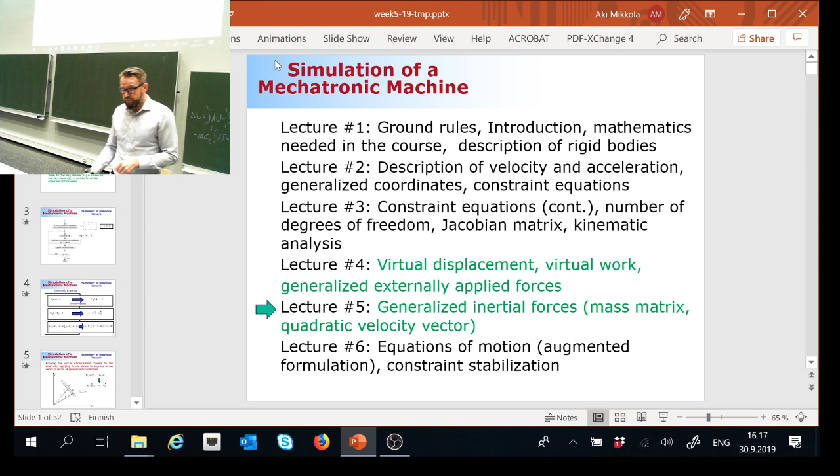Now, there's another reason to have a lecture in the 7th week, and that is related to our students that are following the lecture using this online option. These students are entitled as JEDI students and MEC/ELEC students.

They will be around in week 42, which is within 2 weeks. So they will be here in the university, and they will do the intensive tutorials during that time. I'm hoping that this goes to online participants—once you're here, you'll take this opportunity and come see this lecture live, here in the lecture room, which is 2310.

It's one of the big lecture rooms we have. Hopefully you're here just to see how it appears, how the recordings actually are, and I think it's going to be fun for you too. Now, this affects you too, guys—I mean it affects all of us.

Because in week 42, which is a Monday, October 14th, there is no guided tutorials for other students. So tutorials are for JEDI and MEC/ELEC students only.

So nothing for you in that particular week, except lectures, of course. Also, the next week after that is midterm exam week, so there will be no lectures, no guided tutorials. Only action we have is a midterm exam, nothing else.

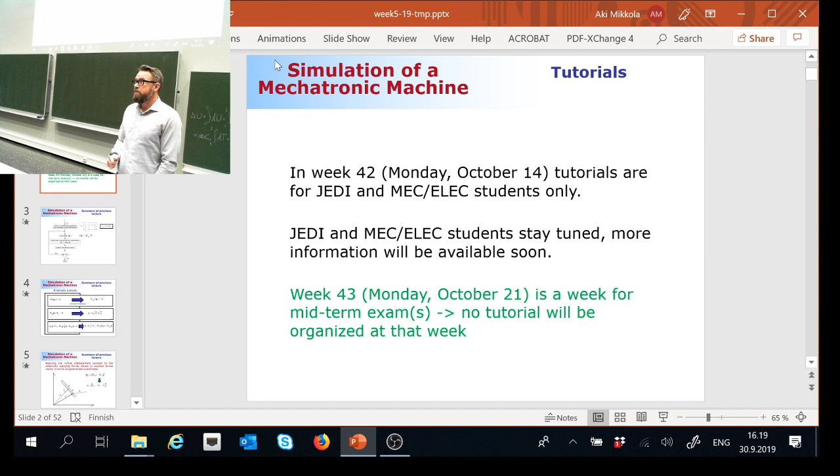Last week we looked at kinematic analysis. Now, let me emphasize this: kinematic analysis is for a system where the number of degrees of freedom is equal to 0. This is the only opportunity to run the kinematic analysis.

How come? Well, simply because the kinematic analysis will be carried out by using the information that is in the constraints equation. Nothing else—that's the only information we need. Now, in order to do that, you have to create something called the Jacobian matrix, which is something you can get when you differentiate your constraints with your variables.

Your constraints are denoted as a vector C, like you can see here. So it's a vector C here.

Let's use this. Now it's here.

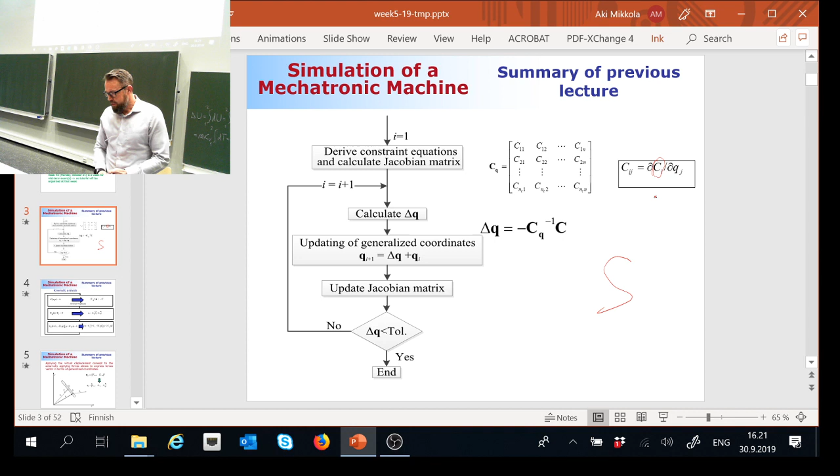So what I was about to explain is that you have to have your vector of constraints, and once you differentiate that with respect to your variables, your generalized coordinates, that's how you build your Jacobian matrix. This equation shows how to compute the individual components within your Jacobian matrix, and your Jacobian matrix eventually looks like the one shown here.

Dimensions of the Jacobian matrix correspond to your number of constraint equations and number of generalized coordinates. You can invert the Jacobian matrix, which is exactly what you need to do when computing the Newton-Raphson. This inverse is possible only when you have a square matrix, and that tells you that the only possibility to run the kinematic analysis is that you have 0 degrees of freedom.

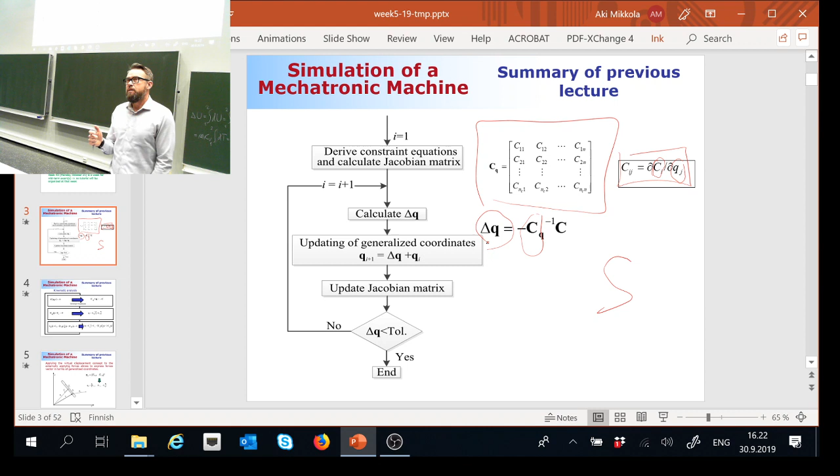This is how you carry out the kinematic analysis at the position level, but there are two other levels you have to handle: velocity level and acceleration level. They look more involved, but in reality those steps are much simpler than the position level, because in velocity and acceleration level the only thing you need to do is a substitution.

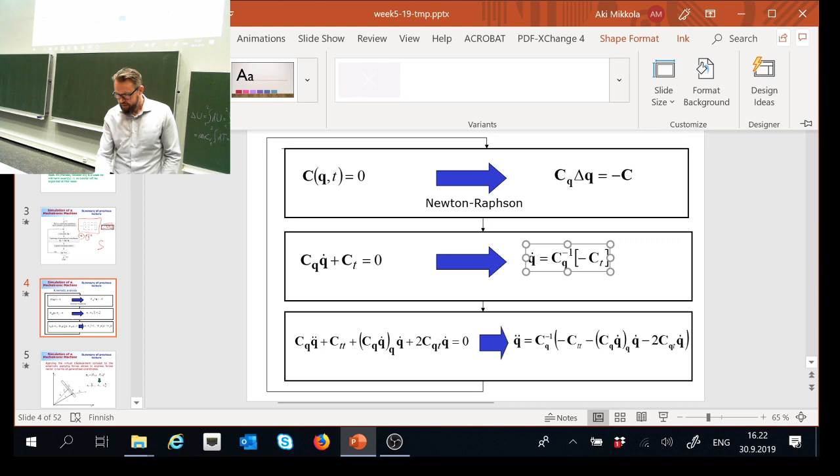Again, there's not... how come it keeps disappearing, my writing? Where can I put my pen? Here? No, here. How did I do it in the previous case? I forgot already. Where was it? Was it here? No, it wasn't here. So was it design, or ink? Where can I see ink? Oh, here, yeah, that's how I did it. So now, I was about... where was I?

Velocity level. Look, I'm getting better at remembering what comes to mind. My memory is very strong but a little short. Anyway, this is the Jacobian matrix that you need to invert, but getting velocity is all about substitution. You substitute your information into these particular locations, that's it. No iterative process, unlike in the position level.

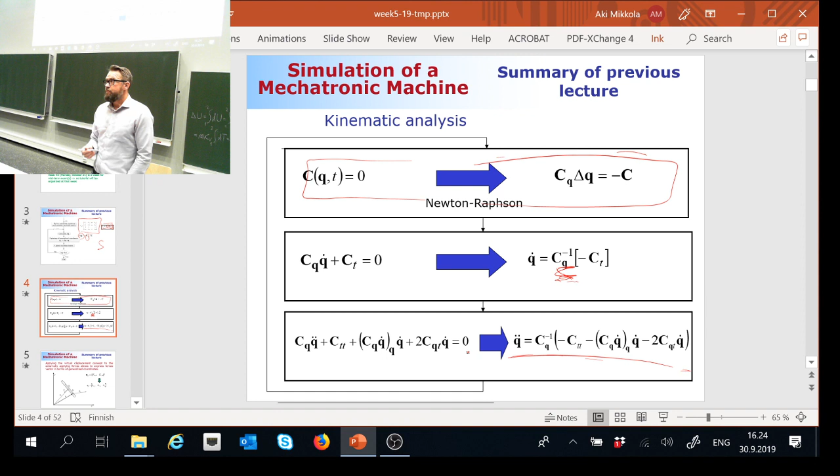The position level is the first step you have to carry out, and that is based on an iterative process. The next one is just substitution, and the acceleration level is also based on substitution only, nothing else.

Last week we opened this painful topic related to generalized forces. Now you need to pay attention, take your notes, and listen, because this is now very, very important to understand. The bad news is that when you were struggling with the concept of generalized external applied forces, you still have to understand it, because next we will apply this very same concept to inertial forces, and it will be a mathematical nightmare, very involving. So you have to understand the concept already this time. Make sure you're paying full attention.

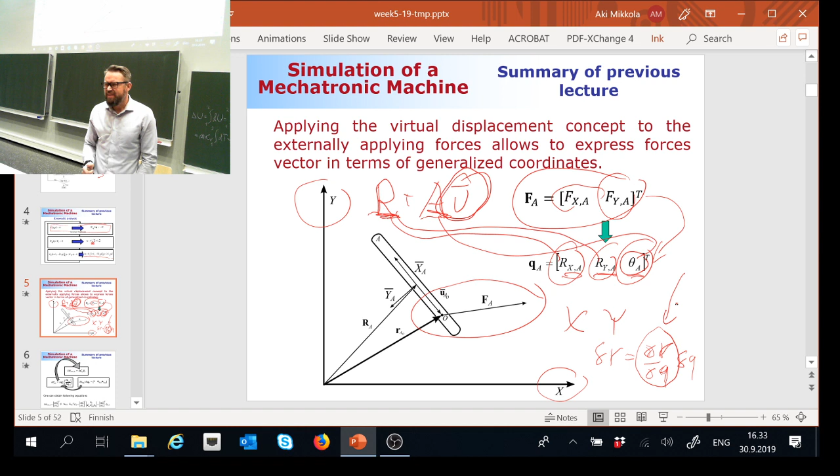I can see some people are doing this, others are like, oh my God, this is painful. My advice is to do this, because otherwise I keep repeating this, and how it comes to your head is like a broken radio. I'm very, very confused.

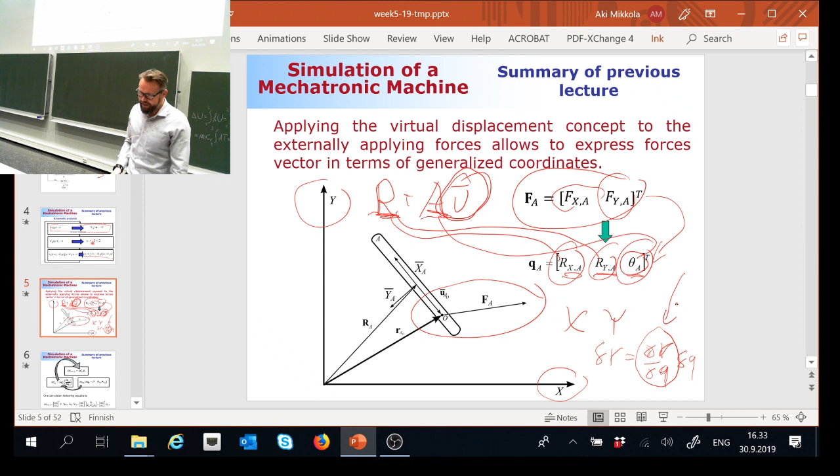Let's summarize. What I'm aiming again is to express my forces using generalized coordinates. How does it go? I have my force expressed using the global coordinate system, and I'm using this concept of virtual work to do the mapping. Virtual work is force multiplied by displacement in the direction of force.

How can we express that mathematically? It's force multiplied by displacement, and the displacement is very tiny, mathematical. Let's call this delta R, one of our mathematical tools. Now we know that this delta R can be related to delta Q, so those are the two coordinates, global and generalized.

This relation takes place with the help of this partial operation, partial R over partial Q. Looking at the details of that mapping matrix, it has 2 rows, 3 columns, and can be expressed such that on the left-hand side I have a 2 by 2 identity matrix, and on the right-hand side is a rotation matrix differentiated with respect to angle theta, then multiplied by vector u bar. Now you do the math, and this is how you express your generalized force using generalized coordinates.

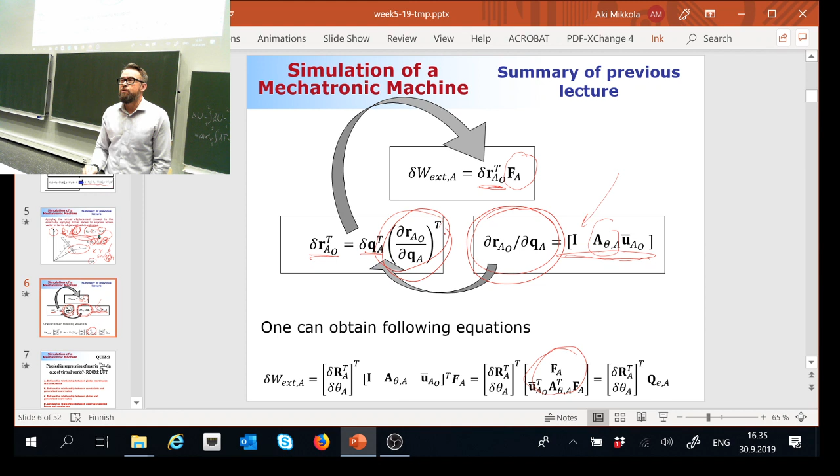That's what it is. So remember last week I asked what's the role of this matrix? There was an in-class quiz asking what that matrix is doing for you. So let me ask again: physical interpretation of matrix partial R, partial Q, in the case of virtual work. The options are: defines the relationship between the global coordinates and constraints; defines the relationship between the constraints and generalized coordinates; defines the relationship between the global and generalized coordinates; or defines the relationship between external applied forces and constraints. Only one is correct, but which one?

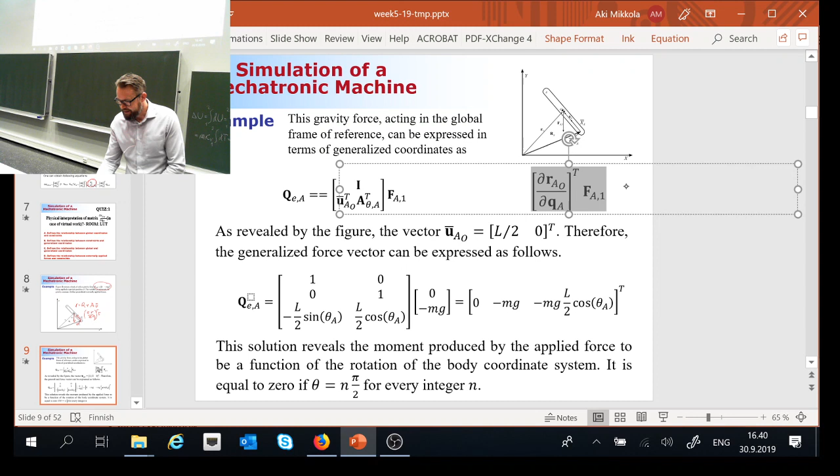That's going to be my generalized force expressed in terms of generalized coordinates. But now I'm going to take a little bit of a shortcut here, using the definition provided a few slides back. In that definition, this map... going back here, this definition was provided here. It was a 2 by 2 identity matrix, and the final component you can get by multiplying the rotation matrix, differentiated with respect to angle theta, with vector u bar.

So I'm going to take that shortcut option, knowing that vector u bar has the component L divided by 2 and 0. By substituting that information, my mapping matrix looks like this.

So this is the transpose of the mapping matrix. Each one of the rows this time, because it's a transpose operation, corresponds to my generalized coordinates. Each one of the columns, again because of the transpose operation, corresponds to global coordinates. So I'm going to multiply my original force with the mapping matrix, and that's going to give me the generalized externally applied forces expressed using generalized coordinates.

Now something interesting is this: the final component associated to angle theta. Obviously this is a moment you can get by computing the lever arm of where the force is applying to, relative to the distance where the body reference coordinate system is located. Look at this, it's L divided by 2 multiplied by cosine theta. So if I go back here... it's this lever arm that is applying to angle theta, my third generalized coordinate.

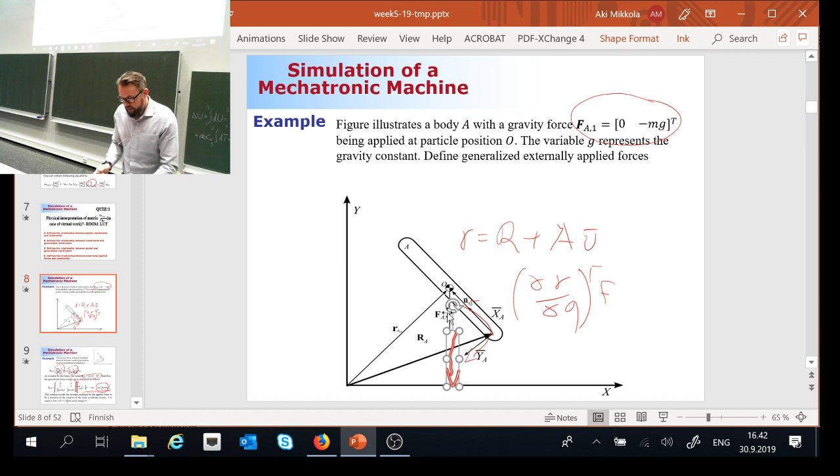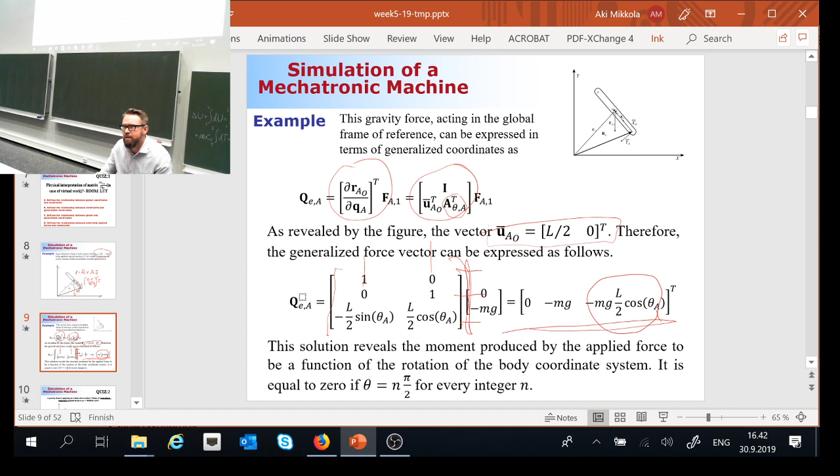Now, to get a better picture of that, I'm going to show you another example. But prior to that, let me take a look at the in-class quizzes. There's going to be another in-class quiz related to a similar kind of question. Maybe too challenging, but I'm still going to give it a shot. We'll see how it goes.

Okay, so we have 84 students, 83 already entered the answer. And the success rate will be what? Someone says 90. No, it has to be an exact number because this is lottery-style. 89? Others? 82? You know what I'm going to say? 100! Correct, 100. So it's going to be 100, and it's very close to it. Look at this, look at this—this is amazing, because last time I think it was like 52 or something. 94, it cannot be higher. I don't think in practice it can be any higher than that, because there are online participants watching Netflix, and then they hear 'in-class quiz,' so they take a look and give a wild shot. And that's it, that's how it is. But it's very good, really good. I'm honestly a little bit proud of myself.

What do you say if we repeat this next Monday? Maybe it's going to work out, maybe I'll do it, because it's quite interesting—this is kind of fundamental to multi-body dynamics. So let me go back here.

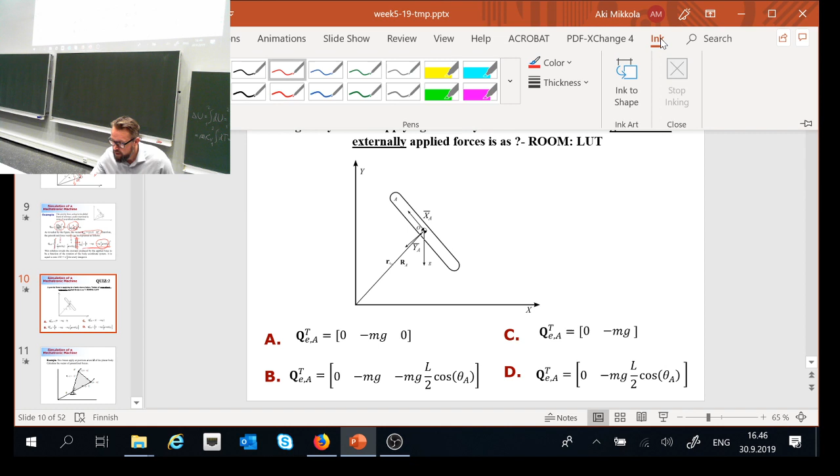Vector that consists of 3 components: 0, gravity constant multiplied by mass in minus, and then 0. And then the same component, but this third component is a little different. Then I have here 0 and mass multiplied by gravity constant, and then my final one is 0, and there's a kind of moment arm. But what is correct?

I'm thinking that even this is difficult, a little bit difficult, but still we're gonna score high in this example. You can hold on, you don't need to enter your answer if you're not 100% sure about that. Think about it a little while, and let me take another example. Once this example is done, then we can come back to this, and this is supposed to be clear to you. All right?

By the way, that's when the fun part will end. Then we're gonna go to that serious business about how we can do this same trick, but for inertial forces. And it's made a mess. I can tell you this already, so enjoy when you can, because soon you cannot. All right? So you have fun? I don't think so. But anyway, let's take a look at this.

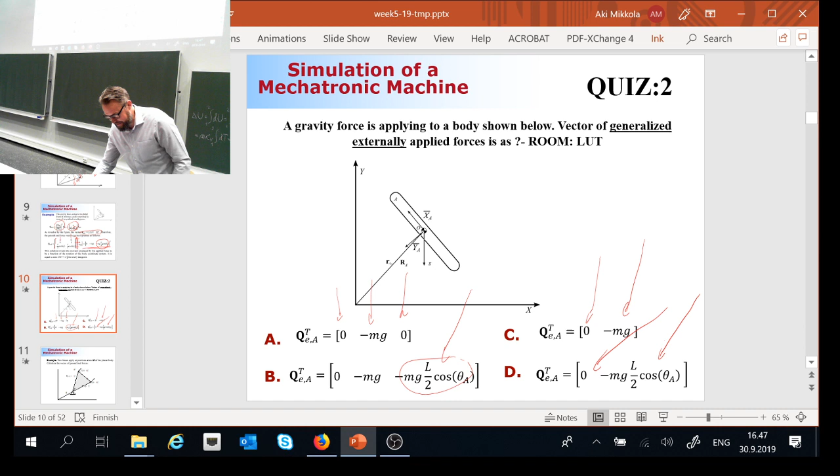Let's look at an example, that next example that I have. Hold on, I'm a little lost. Yeah, look at I have this miracle pen.

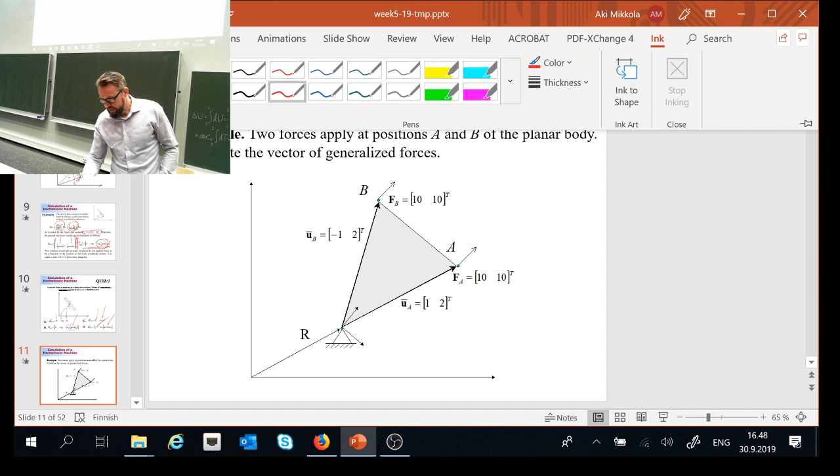So now I have a triangular shaped body. Again, this is a planar shaped body like always in this class. I have 2 forces applying in a triangular shaped body. It's very important to understand that these forces are applying in the global coordinate system. Let me explain that. There is a force applying with respect to global coordinate axis x and y, and the units are 10 and 10. These are numerical values that I'm using here. And it's applying at a position called A.

The position of A is a little off from the body reference coordinate system, because the body reference coordinate system is located exactly where the revolute joint is located at. Then I have another force, also expressed in the global coordinate system, having exactly the same numerical values as in the previous case. This one, though, is applying at position B, up here, with the u-bars needed to express these 2 points shown here.

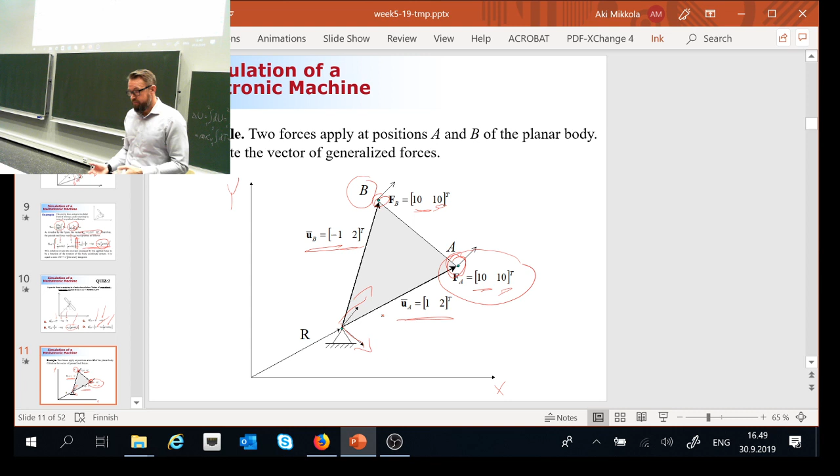Now I would like you to express these 2 forces in terms of generalized coordinates. So what are the generalized coordinates in this particular case? How many coordinates do we have? 3, because everybody needs 3 generalized coordinates. So it's 3 generalized coordinates: Rx, Ry, and angle theta, right? Okay, let's go and make this happen.

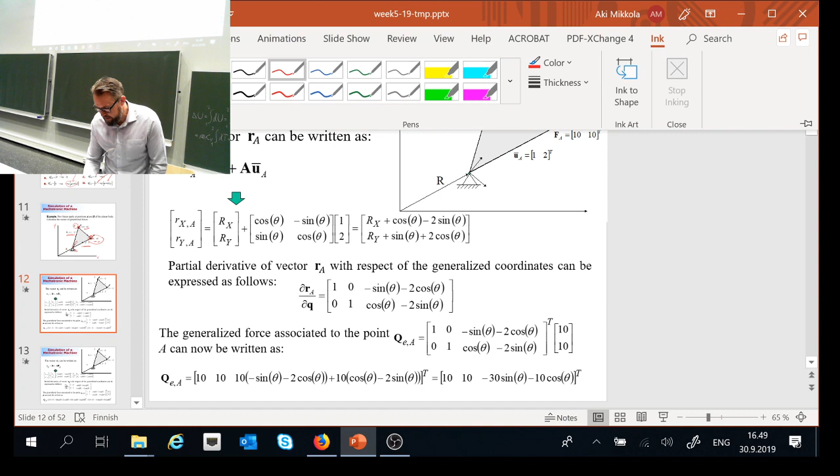Let's first express this location where the force is applying, starting with point A. I'm gonna go ahead and use the equation I'm very familiar with: expressing how the body reference coordinate system is translated with respect to the global coordinate axis. This is gonna be vector R, then I account for the rotation of the body reference coordinate system, which is my 2 by 2 rotation matrix, and then I mechanically substitute my vector u bar into this equation. Now this is when things become clear to you. Look what I'm going to get.

I'm going to get a vector of two components, since this expression is in the global coordinate axis with respect to the global coordinate axis. Now, with no further thinking, I'm going to differentiate these two components with respect to my generalized coordinates: Rx, Ry, and angle theta. When I differentiate with respect to Rx, it gives me 1. With respect to Ry, it's 0. And with respect to angle theta, this is what I get. Yeah, it looks all right.

Then I'm going to repeat that for the next component, which is this one. And here's my mapping matrix. Now I'm going to take this mapping matrix and multiply my force with that mapping matrix. It's going to give me a vector of 3 components because I have 3 generalized coordinates: those are 10, 10, and the component that affects my angle theta.

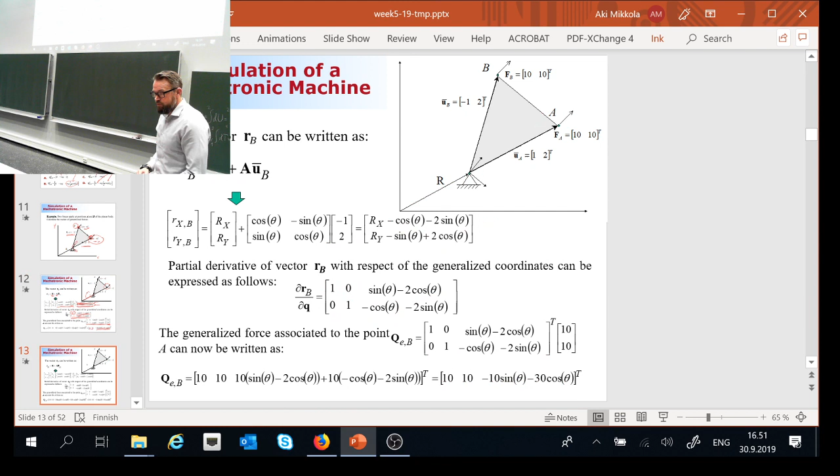Next, I'm going to go over and repeat this same story, but this time for point B. No difference, so let's make it happen.

For point B, I'm going to again take the translation of the body reference coordinate system into account, then the 2x2 rotation matrix, vector u bar that is given in this example, and I'm going to get the vector of 2 components. Now these 2 components will be differentiated with respect to my variables, the same as in the previous case. It's going to give me the mapping matrix, and again the dimension of the mapping matrix is 2 rows, 3 columns.

Makes sense? Simple stuff, not very difficult. Can-do attitude.

Okay, so I have this mapping matrix, and then I'm going to take my force and multiply that with my mapping matrix. It's going to give me, again, 3 components.

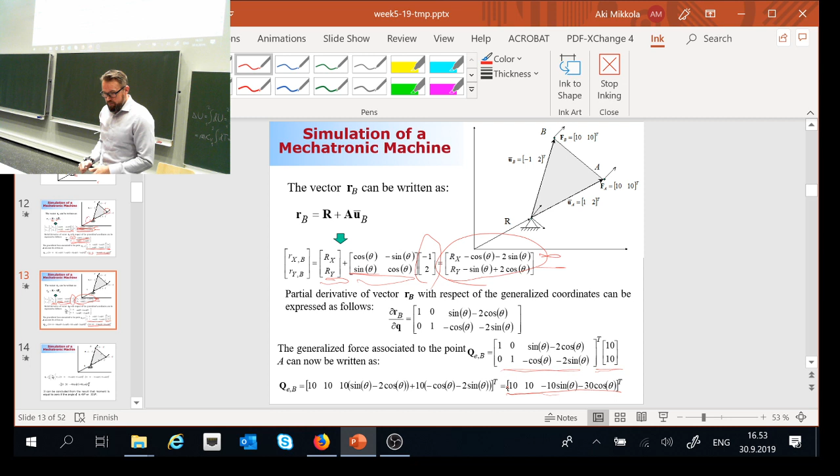Now two forces are applying to a single body. How can I summarize the effect? Simply by summing up these 2 vectors because they are applying the same components. So here's my first, almost a mistake, it's close. Here's my first vector, my second vector. When you do the math, this is how it reads.

Now, how much do they affect my angle theta, my generalized coordinate? If the body orientation is 45 degrees or 315 degrees, they will disappear, because they're pointing all the time in the same direction, and when exactly the body is in this orientation, they will eliminate themselves with respect to angle theta. Make sense?

Beautiful. Now let's go back to this in-class quiz. Do you need more time?

Okay, so let me summarize the findings we have here.

What was that, sir? You understood this, but you are worried about your fellow students. Yeah, I understand, that's what I'm doing as well. So I'm not asking, I'm saying, Professor, can you repeat, because I think my fellow students don't understand. I figured this out already a while ago, but okay. Okay, but remember, if you are the one raising your hand and saying you don't understand... was it lunch or dinner?

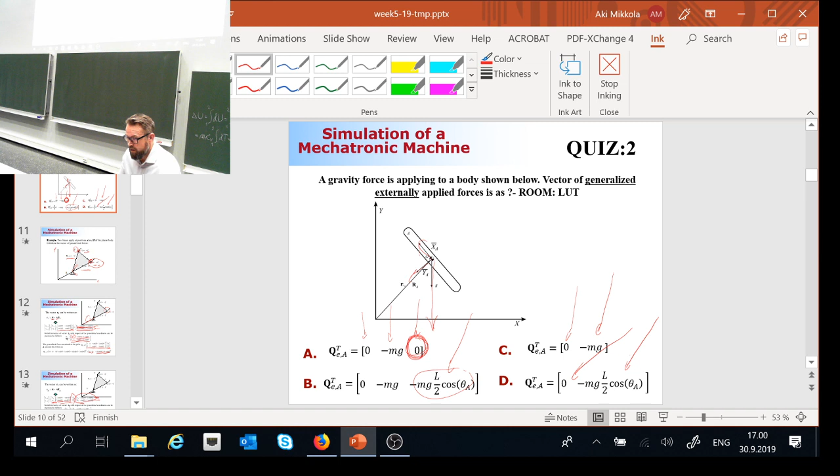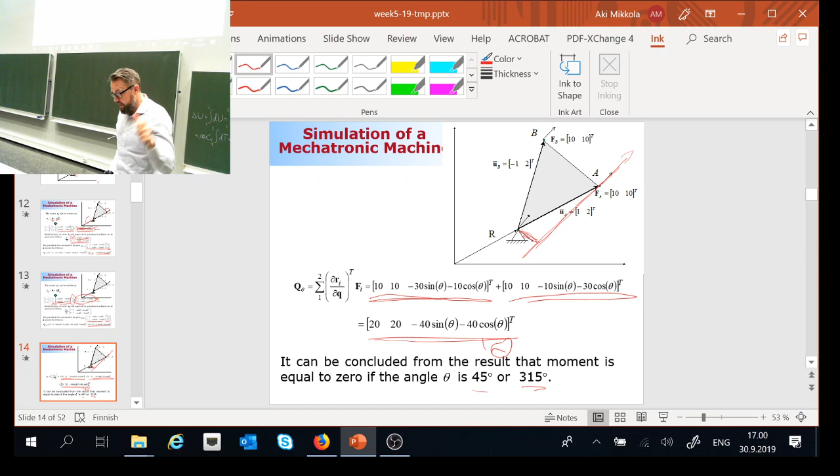Okay? All right, so it's 5 o'clock. Today you definitely need to have a break. Not because I think you're still scoring really well, but because this second in-class quiz was a little bit difficult. But now what follows is what we did in the past. Let me explain the big picture here, and then you will have your break.

This is an equation that we're looking at when we're studying the dynamics. According to this equation, externally applied forces have to be equal to inertia forces. What is inertia forces? That is mass multiplied by acceleration, which is a force equal to the externally applied force. Those two forces have to be in balance, and if they are in balance, then you're going to have a dynamic equilibrium.

So we wanted to express the dynamic equilibrium such that our unknowns—and again, what are our unknowns? Those are generalized coordinates, vector Q, explicitly mentioned. How we did that in the first part is associated with the externally applied forces. We did that by converting the force to be expressed using generalized coordinates.

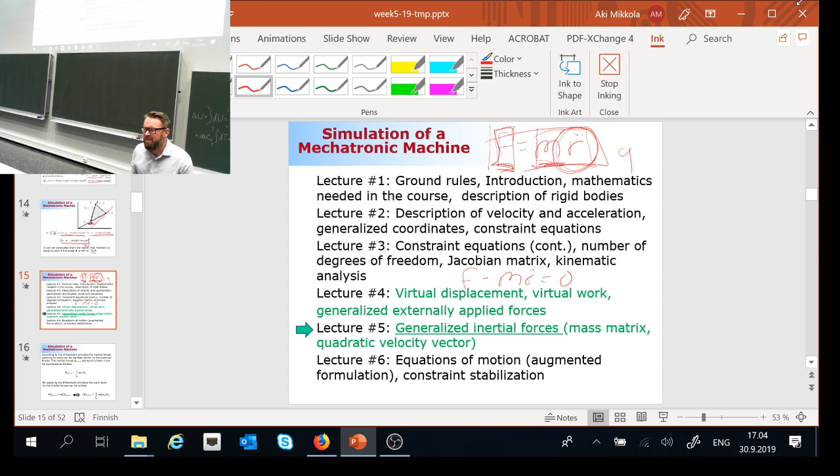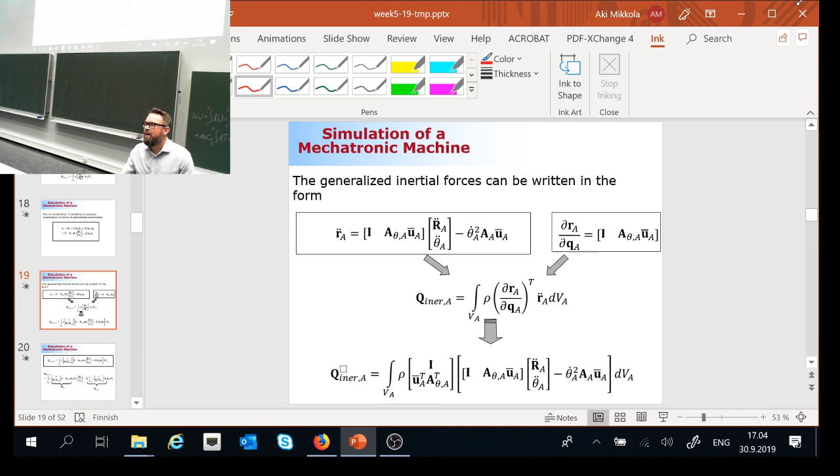Think about that next. Let me say, how much time do you need, because the next stuff that is coming is very, very painful, super painful. Just to give you a little taste of what comes, it's like this. Ooh. Oh God, it's like, really? But yes, really, that's what I'm gonna do.